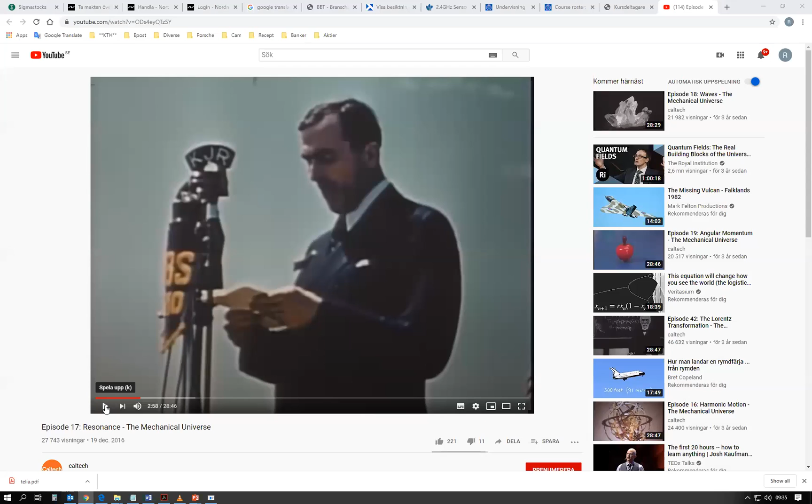Before starting the lecture, I want to show you some video clips from structures under vibration. We can start with the very well-known Tacoma Narrows Bridge. I think most of you have heard about this bridge and maybe also seen some of these videos. This is a suspension bridge from the 40s that collapsed due to oscillations from wind-induced vibrations.

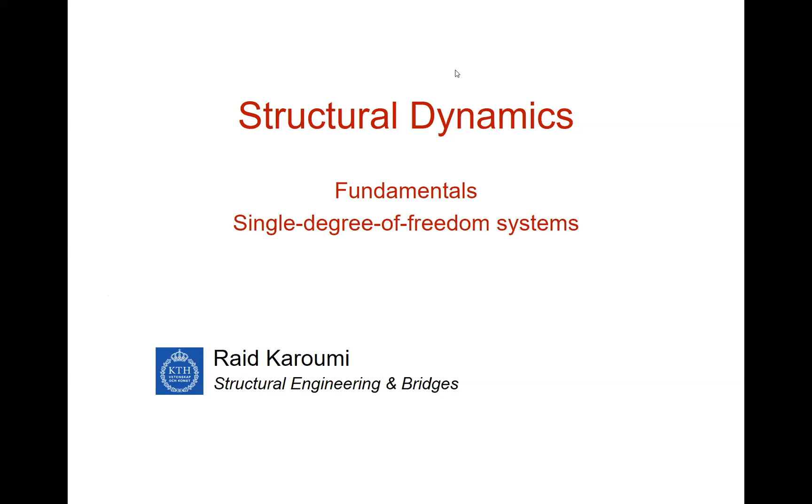So the aim of the lecture today is to understand what is a dynamic problem, how can we make a model of the dynamic problem, and how can we idealize a problem into what we call a single degree of freedom system. This is a system that can be described by one coordinate, one single degree.

Also how to calculate the frequencies for such a single degree of freedom system, and how to calculate the response, the displacements of a single degree of freedom system excited by a harmonic loading.

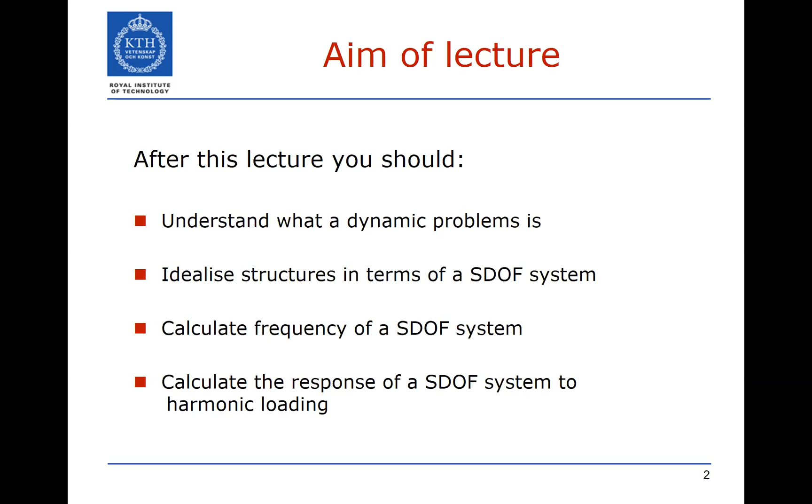So what is a dynamic problem, and what is the difference between a dynamic problem and a static problem? Well, this actually depends on the time for the loading. If we have a load applied on a structure very, very slowly in time, then that is a static problem, not a dynamic problem.

On the other hand, if the load is applied quickly on the structure, or the load is moving in position, for example a vehicle moving on a bridge, then we no longer have a static problem, we have a dynamic problem. This depends on the speed of the vehicle moving on the bridge. If it's moving at a crawling speed, we can still talk about a static or quasi-static problem. If it's moving at high speed on the bridge, then it's definitely a dynamic problem.

So time-dependent loading will lead to dynamics.

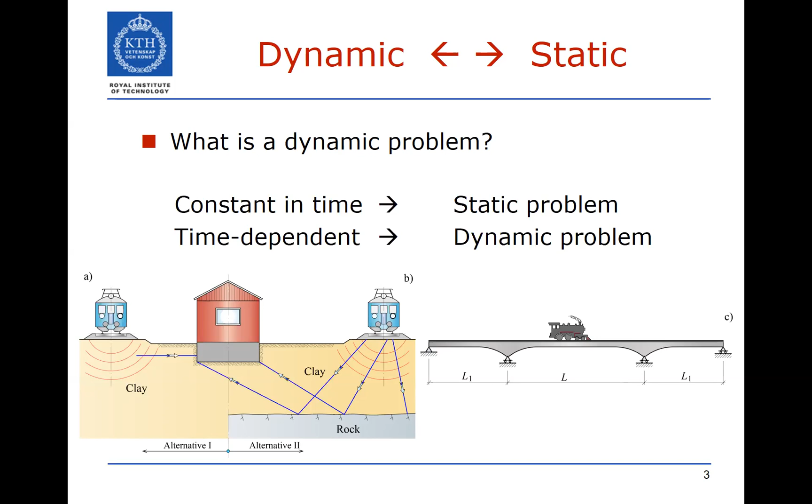Vibrations can be induced, as we saw on the Tacoma Narrows Bridge, by wind. They can be induced by traffic, for example a train moving at 300 kilometers per hour on a bridge. They can be caused by humans, for example on pedestrian bridges, human-induced vibrations. This is, by the way, the subject of the PhD project of Daniel, who will assist you. Daniel is working on human-induced vibrations on pedestrian bridges, and Reza, the other assistant, is working on traffic-induced vibrations on bridges.

Vibrations can also be induced by machinery, for example in industry, on the floor—machines on the floor can induce vibrations. They can also be introduced by, for example, a ringing bell in a tower, which can induce vibrations. They can also be introduced by waves, for example wave-induced vibrations on this turbine tower. This turbine tower, of course, suffers from wind-induced vibrations as well as wave-induced vibrations.

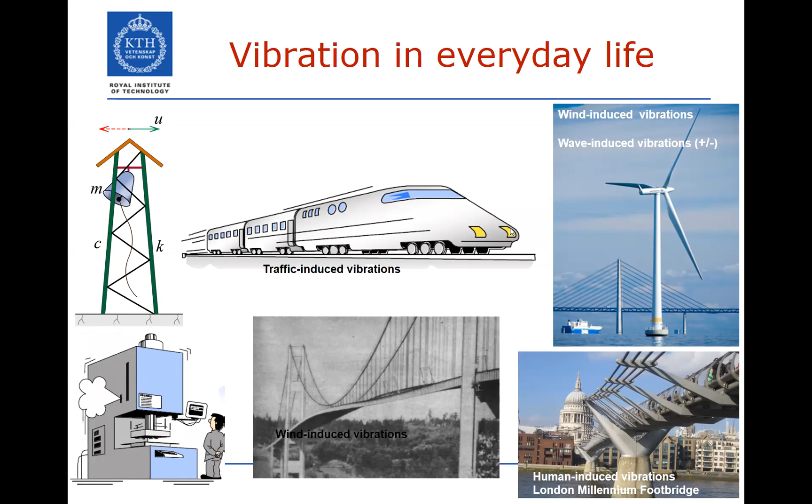But also the well-known problem of earthquakes. This is one of the most serious dynamic problems because it will lead to a lot of injuries and loss of buildings, bridges and infrastructures. In this course, we will learn how to design structures according to the Eurocode for seismic loading.

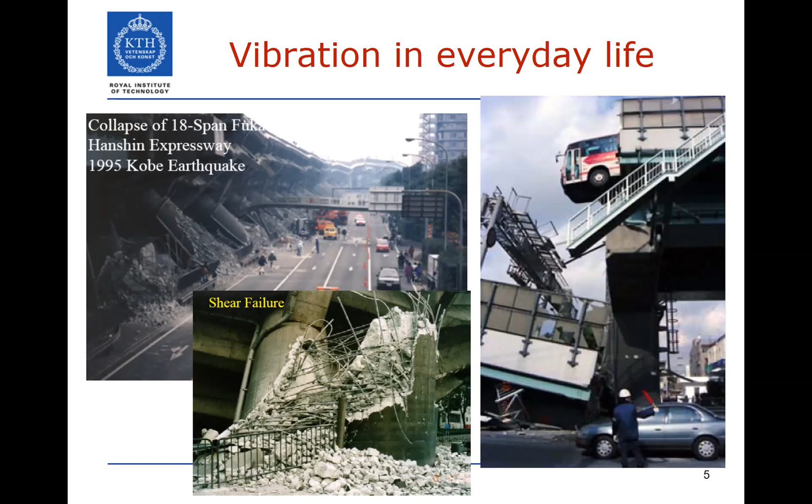Now, some vibrations can also be used for our benefit. I'm thinking, for example, of the concrete compactor used to compact concrete while casting. We can also think of the pneumatic hammer, used to break concrete or any surface. So there are also vibrations we can use in our daily life, such as driving piling into the ground with a hammer to induce vibrations. Very good examples of useful vibrations.

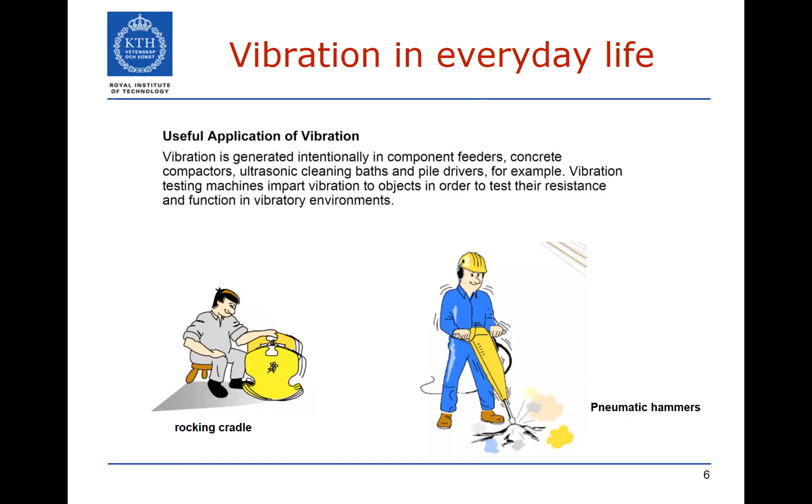Vibrations can be characterized based on the load types and the type of excitation. So we talk about periodic loading, and periodic and harmonic loading.

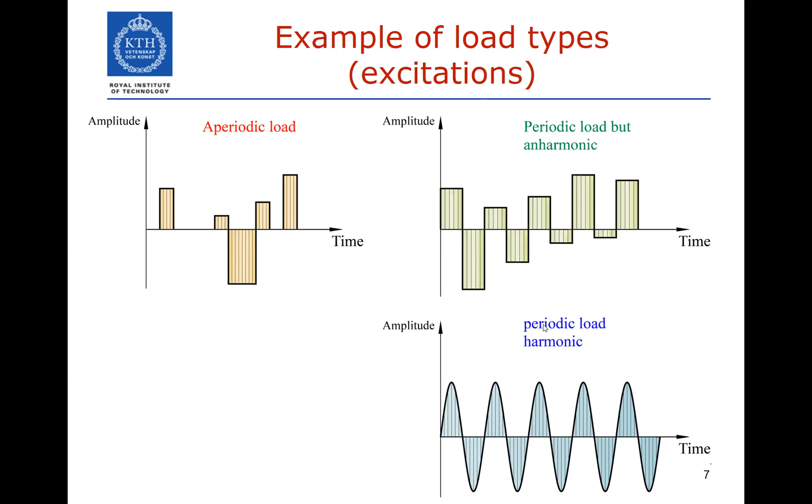Now, if the periodicity is also harmonic, like a sine or a cosine, then we talk about a periodic and harmonic load. So: an aperiodic load, periodic but not harmonic, and periodic and harmonic. A harmonic loading can be described with a sine or a cosine.

And then we have an impact loading. This kind of loading has a very short duration in time. It can be a blast loading, for example, lasting probably only a few milliseconds.

Then there is random loading. This is a general kind of loading which is random. For example, wind excitation can be a random loading, or a vehicle excitation can be random if there are many vehicles traveling on a bridge. Typical with random loading is that if you study any time instance, you cannot predict what will happen next minute, because it's random in nature. If you have harmonic loading, you can predict what will happen at any point, because you know the behavior of the load is harmonic.

In this case, it's random - you cannot tell what will happen in the next time step. It's a random loading.

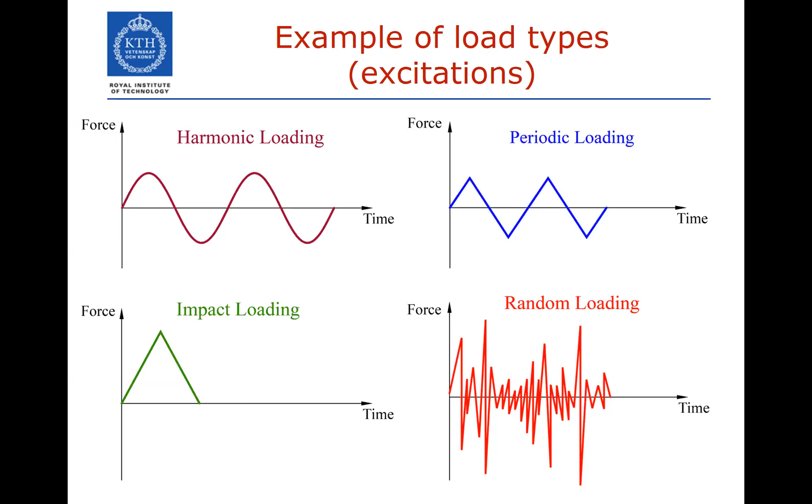Some examples: periodic loading would be a machinery, let's say a washing machine on the floor - that's periodic. An engine from a boat is also quite periodic. A blast loading on a building is not periodic - that's an impact loading. An earthquake is a typical random loading - a very good example, since you don't know what will happen in the next time step. The amplitude, vibration levels, and all of this are random.

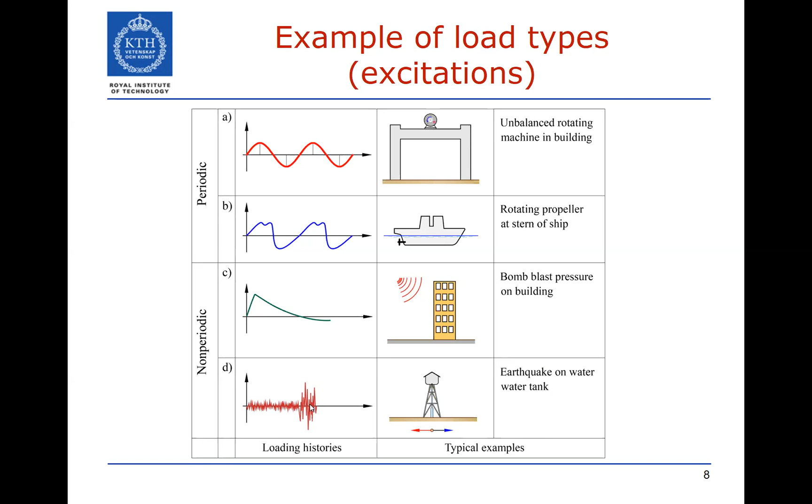We can also characterize vibrations into these types: free vibrations, forced vibrations, transient vibrations, and steady state vibrations.

Free vibrations are the vibrations a structure undergoes when there's no external loading. For example, we hit the floor, jump on it, and then there's no loading on the floor - the floor vibrates in its free vibration. Or we hit a table, remove the load, and then we have free vibration.

Forced vibration is when the load acts with its dynamics on the structure all the time - for example, a washing machine on the floor is a forced vibration. Transient vibration occurs the first time you start, for example, the centrifuge of a washing machine - it gives high vibration levels at the start, and then due to damping these die out quickly. What remains after a few seconds is a harmonic loading, which we call steady state vibration. So transient is when the load is first applied, and steady state is what remains after the transient has disappeared.

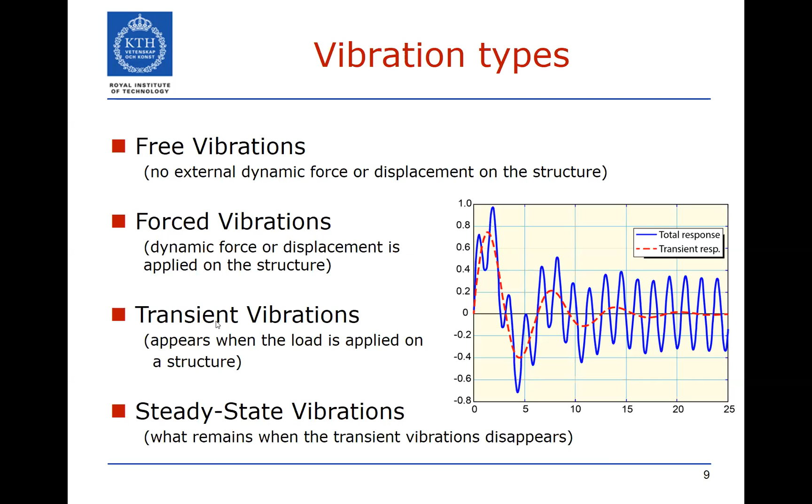Remember these, the 4 important types of vibrations. You have to understand the difference between them. Free vibrations: there is no load on the structure while the structure is vibrating. Forced vibrations: when there is a load on the structure. Transient is the few 10-15 seconds when you apply the load on the structure. The steady state is the vibrations which remain after the transient has died out.

So, single degree of freedom systems. I think most of you have done the course on structural, on the finite element course in the spring this year, so you understand the concept of degrees of freedom. Degrees of freedom are the possible rotations or displacements of a structure, for example, the node of the structure. This lecture treats the single degree of freedom system, which means a system that will consist of only one degree of freedom that can describe the motion.

So if we look at this cantilever, which is fixed at this end and free at that end, the motion of this cantilever can be described by this single degree of freedom system with only one coordinate, u. The u is the vertical displacement, for example, the vertical displacement at the tip of this cantilever.

So the mass of the system can be idealized by this mass. Now this mass is not the complete mass of the cantilever, it's only part of it, because part of this cantilever is actually not moving. As you can see here, the part at the fixed end is not moving at all, so that mass is not counted. It depends on the boundary conditions and the mode shapes how large this mass is.

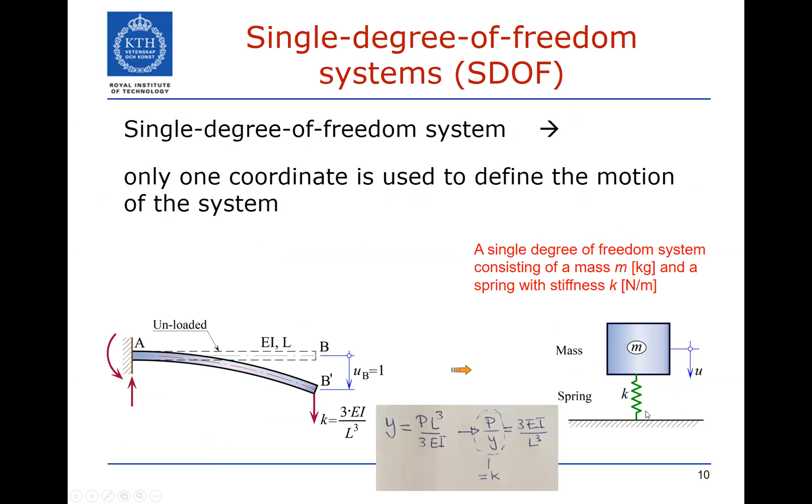Sometimes I will draw it horizontal, but it's the same. You have a mass connected to a spring, connected to some fixed point, and this mass is affected by a force P, which changes with time t. This is a single degree of freedom system described with one coordinate u, also dependent on time t. If we pull this mass a magnitude of u...

We can construct a free body diagram. This is the mass, and on it we put all the forces acting on it. We have the external force P(t) pulling to the right, and the force in the spring pulling it back to the left. The force in the spring is related to the spring stiffness and the displacement: since stiffness is force divided by displacement, force equals stiffness multiplied by displacement. So this is the force in the spring.

Then we have something else: the inertial forces, in Swedish called tröghetskrafter. These are related to the mass. These are the forces you feel when in an elevator that is accelerating or stopping — you feel the inertial forces of your own body mass. These are related to the acceleration, u double dot, the second derivative of displacement. The mass multiplied by u double dot gives us the inertial forces.

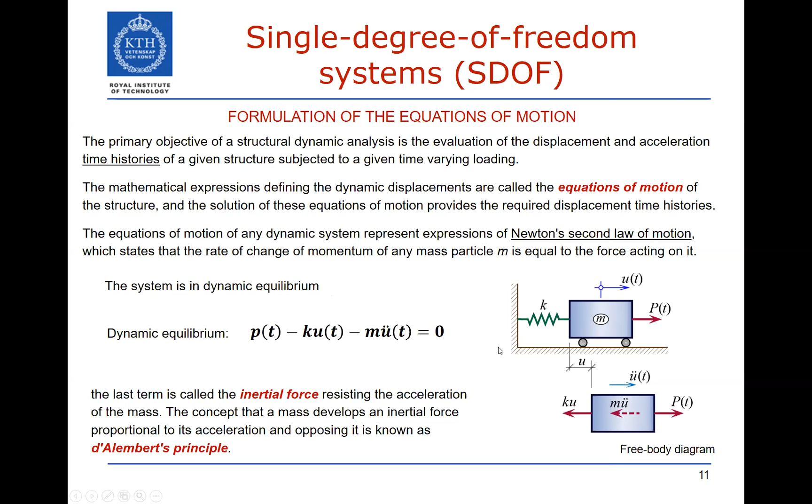Before we take a break, let's look at this vibrating mass connected to a spring again. We have a mass connected to a spring K, and by putting the mass on the spring it displaces by a magnitude delta. This delta is the static displacement due to the mass connected to the spring.

When we connect the mass, the spring displaces by magnitude delta. On the mass we have gravity mg, and we have the force in the spring pulling it up, which is K multiplied by the static displacement. Now, if we pull this mass a magnitude U downwards and release it, it will go into free vibrations because we pull it and then remove the load. By pulling it a magnitude X, we increase the force in the spring by the displacement X.

X is changing with time here, so we use the coordinate U instead of X. We have added the mass, and the spring has elongated by delta. The force in the spring can be noted like this — this is the equilibrium, K delta equals mg. And we pull it a magnitude U.

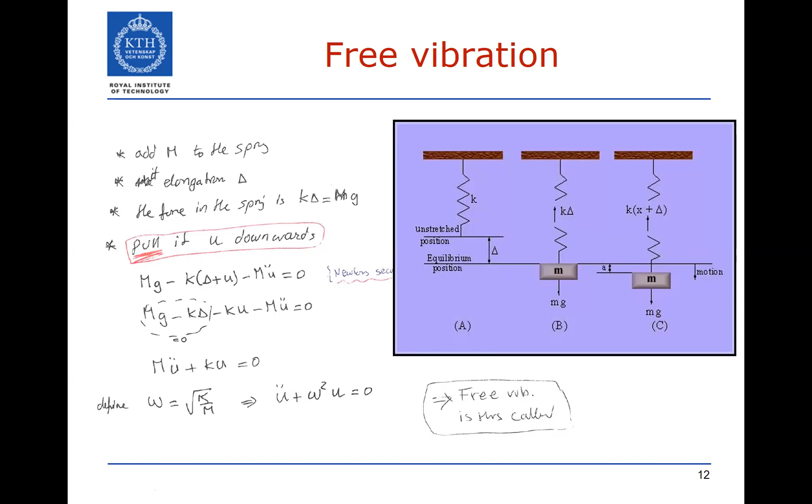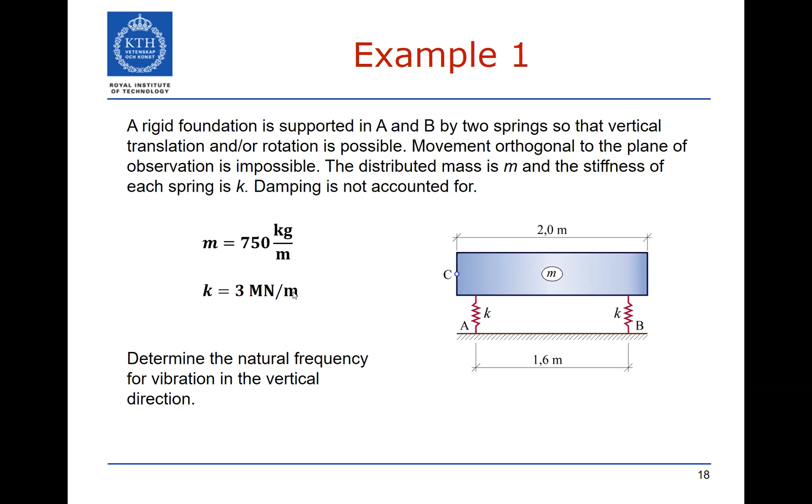In this example, we have a concrete slab resting on 2 springs or 2 piles. The mass is given as 750 kilograms per meter. The stiffness of each spring is 3 meganewton per meter, and we are asked to calculate the frequency. The frequency is the square root of K by m.

As you see here, the circular frequency accounts for 2 springs. This is the spring coefficient, and we have 2 springs. As you see, it's 10 to the power of 6, because this was given as 3 meganewton per meter, so now we have it in Newton per meter. The mass was 750 kilogram per meter, and it's 2 meters. So 2 meters, 750 - this is the mass of the slab. This is the circular frequency.

If we divide by 2 pi, we get the frequency as 10.1 hertz. This means that if we pull or push this mass and then remove our hand, it will start to vibrate 10 times per second - it will bounce up and down 10 times per second.

If this is good or bad, we don't really know, because it depends on the force acting on it. So 10 hertz can be good, it can be bad - it depends on what kind of force we have on this slab.

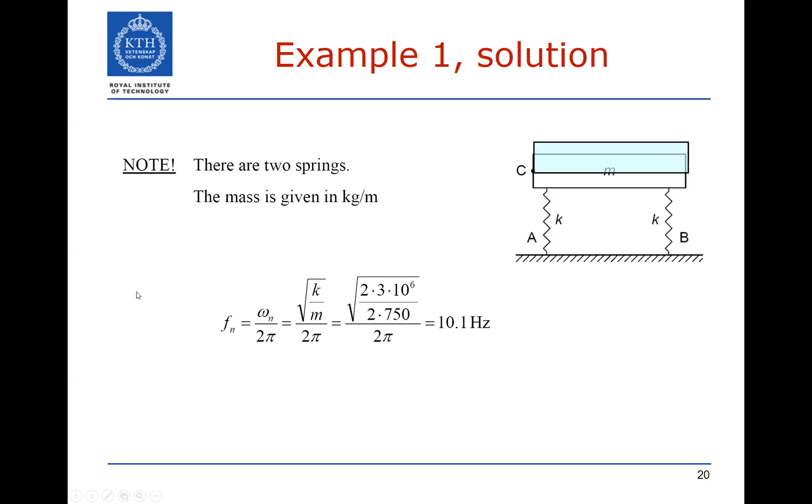So now we had two springs, and as you saw, we added - or multiplied by 2 - to get the total spring stiffness, because they were in parallel like this.

If the springs are not in parallel, if they are in series like that, then this expression applies: you take K1 inverse, K2 inverse, add them together, and that is equal to 1 over the total K. If you have several springs K1, K2, K3, K4 in series, you can calculate the total K using this expression.

How do we get this expression? By studying this mass, we pull it with a magnitude of 1, and then we will have U1 displacement here, F1 force, U2, F2 force, and we have K1, K2. The total force we are pulling with is K, because the displacement is 1, so the force will be K multiplied by 1. The force F1 will be the spring stiffness K1 multiplied by the displacement U1. The same thing, the force F2 will be the spring stiffness K2 multiplied by the displacement U2. But of course, the forces have to be equal due to equilibrium.

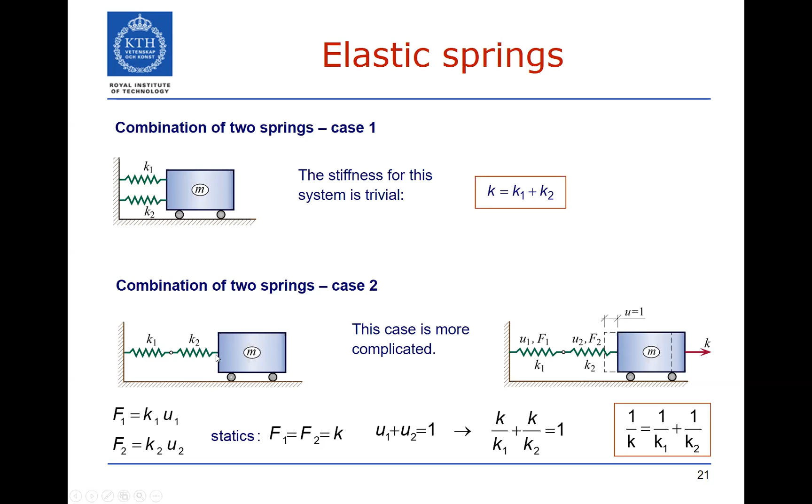On Canvas, I have uploaded a table that gives you some expressions for the spring stiffness for different cases. As you see here, for example, this is for a single spring. The stiffness can be calculated as EA by L if we know the kind of material, the area of the spring, and the length L. I will show you how to do this.

If it's 2 springs in series, or if it's in parallel, we just add them. For the cantilever, as you saw before, we can look in our engineering tables.

Now, how do we get this? Well, simply by looking at Hooke's law: epsilon multiplied with the E modulus equals sigma. Epsilon can be replaced with delta L by L, the elongation divided by the initial length. The elongation is U, the initial length is L, and sigma is the force acting divided by the area. If we take the force divided by U, this gives us the spring stiffness, the spring coefficient, which equals EA divided by L. So this is how we get K equal to EA divided by L just by using Hooke's law.

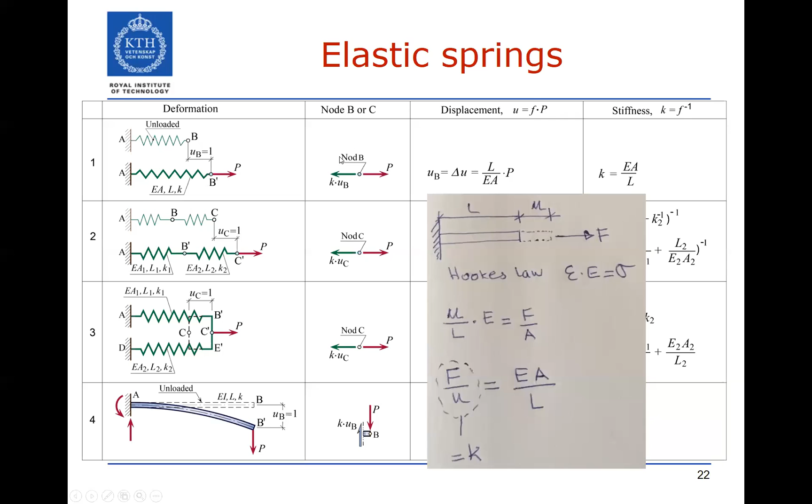So let's see how we can solve the equation of motion. I will not go through the general solution of the equation of motion - you will find this in the textbook of Chopra, or actually in any textbook on structural dynamics. It will take like half a lecture to go through the derivation of the solution, but I will show you the principles and the main equations.

Now we have again our mass system, and we have also added a damper. As you see here in the dynamic equilibrium, what's been added is this extra term for the dashpot force, because the dashpot is a hydraulic dashpot which develops a force in relation to the velocity - it's a viscous damper. So a viscous damper develops a force in relation to the velocity of motion, denoted with u dot. This is the acceleration, this is the velocity, and this is the displacement. So when we look at the free body diagram, we have the inertial force, the spring force, and now also the damper force.

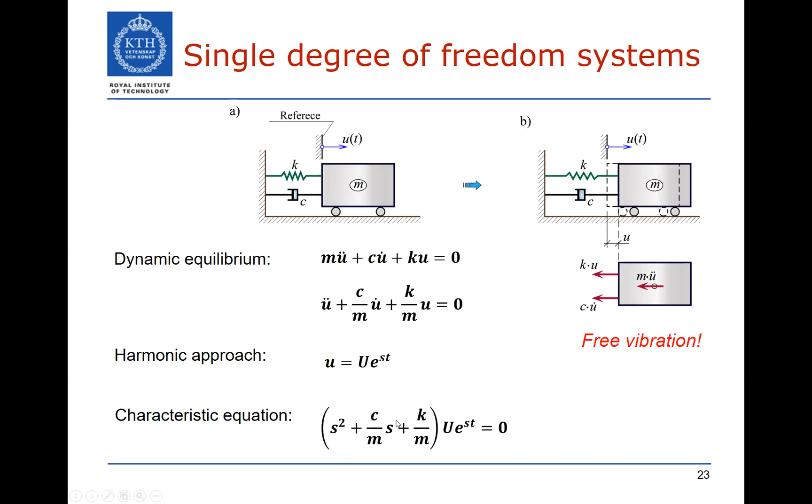Okay, so this is the characteristic equation, and this is the solution of the characteristic equation.

Now we can define a few things. You have seen the definition of omega n, the circular frequency, which is square root of k by m. We can define a new parameter called beta, which is the ratio between s and omega n. And then we can define a parameter called the critical damping, which will give this 0. Everything under the square root will be 0 if the critical damping is this, if C is equal to that. If C is equal to this, then all this will be 0. So we call this critical damping.

And then we can define another parameter, super important, called the damping ratio, Xi. This is the damper coefficient C divided by the critical damping. This is the critical damping, and this is the damping in the system.

So by defining omega, beta, the critical damping, and Xi, we can enter this in the equation, and we can then also write the solution U e^s t into U e to the beta omega n t instead of s. The solution for this, you can go through the derivation in the textbook. The solution will depend on beta. This is just a way of rewriting this equation, considering beta and Xi.

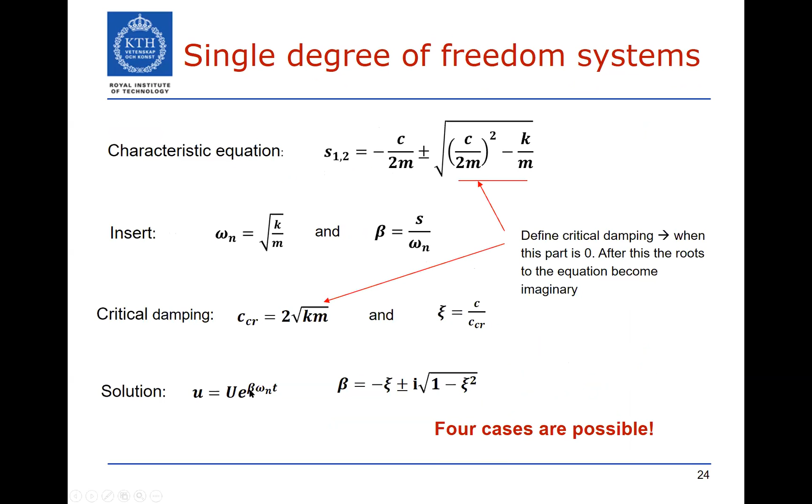So beta will be plus minus i. We put beta plus minus i in here, and we get this solution for the differential equation. This is the undamped system, undamped because Xi equals 0. Xi equals 0 gives us beta equal plus minus i, which gives us the solution U equal to this. This can be described as an exponential function, or as a sine with a cosine, or a sine with some shift. This is actually a very important case.

If we try to plot this motion, we see here the time history and also the response of the system in the circular diagram. We see the displacement in red. It starts here and has some periodicity with t equal to 2 pi divided by the circular frequency. The displacement is red, the velocity is blue. Interestingly, you see that when the displacement is 0, we have the maximum velocity.

This is not so strange. Imagine you have this mass connected to a spring. When the mass is in its 0 position, you have maximum velocity when it's moving. But when the mass has its maximum position, it stops and returns back. Then the velocity is 0 and the acceleration is high. So when the mass is in its turning position, the velocity is 0, but the acceleration is high. And when the mass is at 0 position, the acceleration is 0, but the velocity is high.

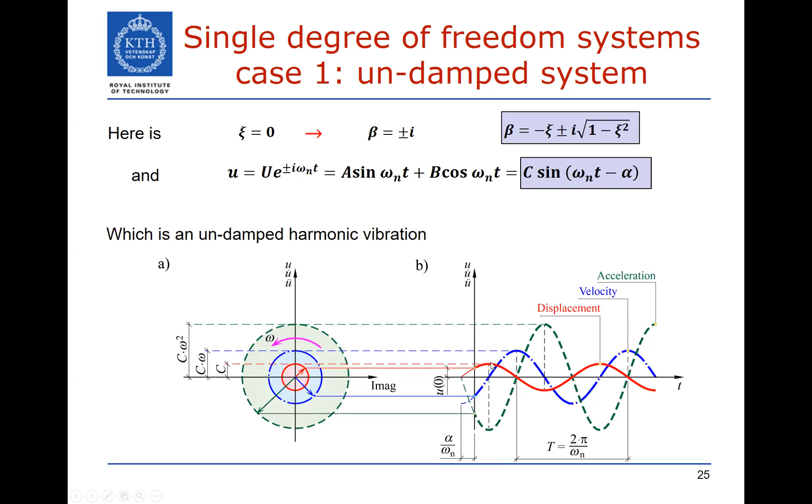Okay, so that was the first case. The second case is if C is not 0, we have some damping in the system, but it is very low, so we call this under-damped system. So Xi is less than 1. If Xi is less than 1, the beta, this is the expression we got for beta, will be positive, and this will be a negative number here. So we put this in the equation and we can solve for this.

What we will obtain is a response which will look like this. We will have some oscillation, but the oscillation will die out after a while due to the damping. If we have low damping, this will take longer time. If we have high damping, this will take a shorter time. So this will be described as before with this sine, but now we have added this exponential function, which is the damping in action in this vibration.

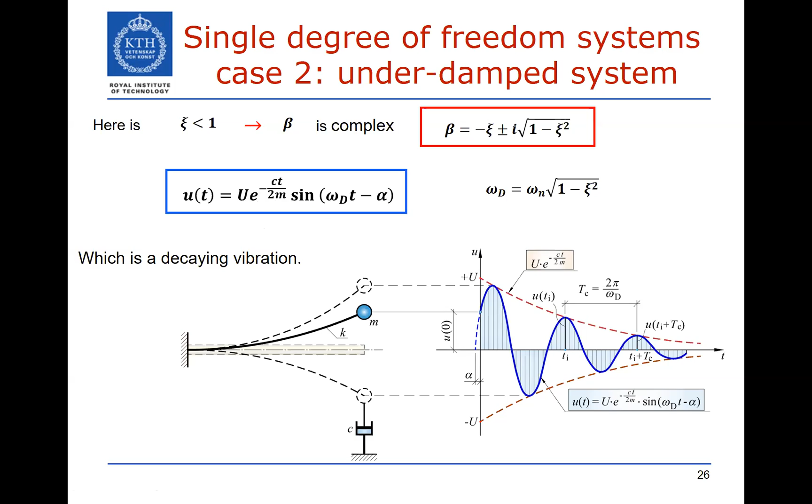And then case number 3 is when Xi is equal to 1, which means that the damping is the critical damping in the system. The beta will be minus 1, and U will be described like this. These cases are actually uninteresting for us because they are more for mechanical systems, like when you are designing satellites and airplane wings and things like that.

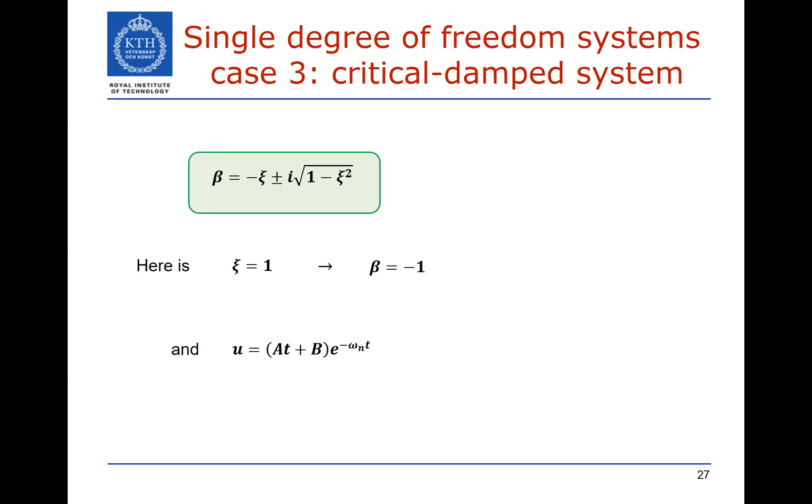So in certain cases, depending on the device that you are designing, if it's an X-ray machine that's not allowed to vibrate, or a satellite antenna that's not allowed to vibrate, then you might design it for overdamped or critically damped systems. Otherwise, in all our civil engineering structures, we have underdamped or very low damped structures.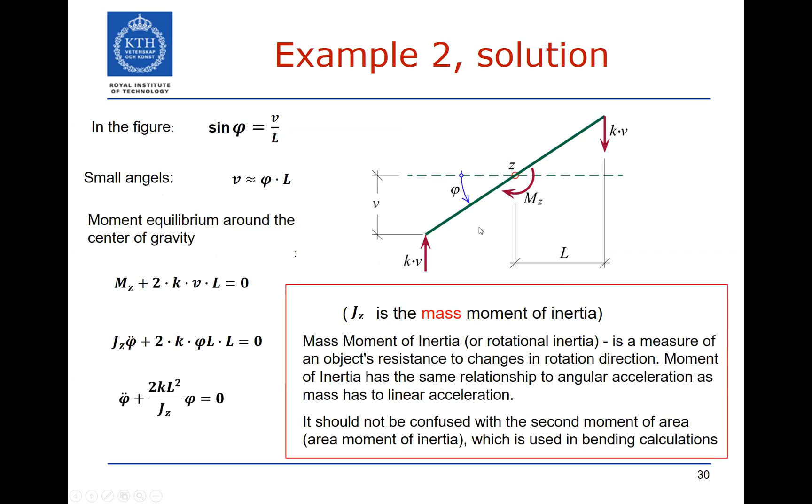From your handbooks in mechanics, you can find the mass moment of inertia. For a point mass, the mass moment of inertia is the mass times the square of the perpendicular distance to the rotation point - the distance from here to the point where we want to calculate the displacement or the frequency of the system. We can calculate it like this.

The mass of the system is 2 meters multiplied with 750 kilograms per meter. This distance is 1 meter - from here, so in total it's 2 meters, and from here to there it's 1 meter, divided by 3. So this is the mass moment of inertia.

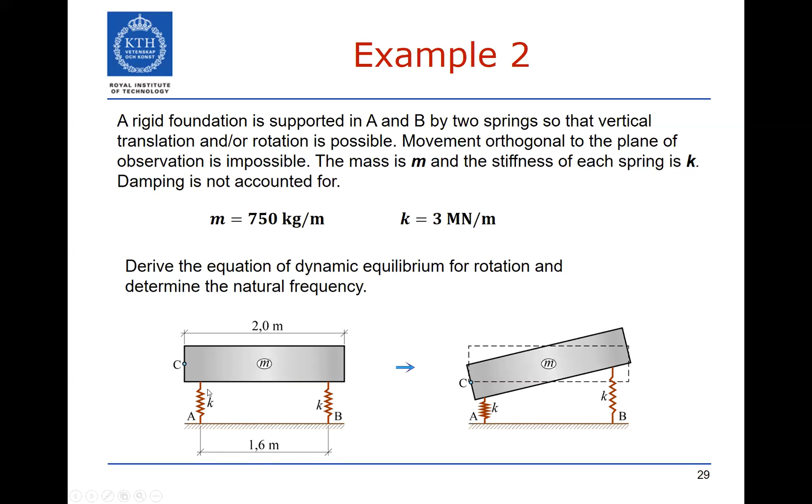To calculate the frequency, it's the square root of this: 2k, this is the k, we have 2 springs. This is the distance from the spring to the center of gravity - the spring is here, and the distance between the center of gravity and the spring is 0.8 meter. Then we calculate and get 14 hertz.

So in example 1, we solved this for the translation, and in example 2, we solved this for the rotation. We found that for the vertical motion, we have a frequency of about 10 hertz, and for the rotation, we have a frequency of 14 hertz. The way this moves, we call a mode shape - this is mode shape number 1, and this is mode shape number 2, the shape of the motion.

Again, these numbers do not really tell us anything at the moment, because in order to know if these numbers are good or not, we have to have an idea of the force acting on the system. If we have a force acting in the middle at, say, 10 hertz, or a force acting eccentrically at 14 hertz, then we can get problems. So in order to know, we have to study the force acting on the system.